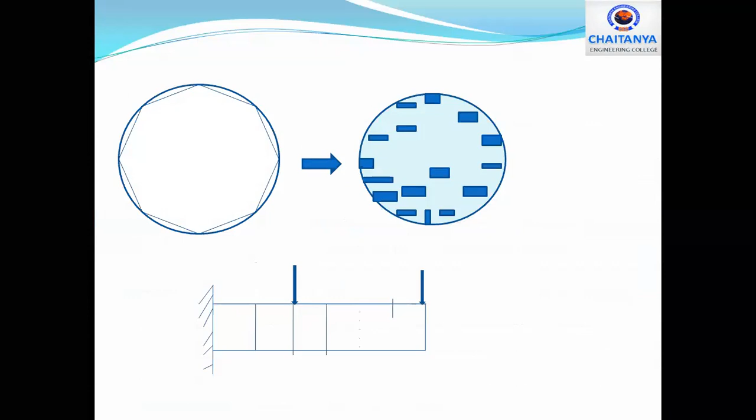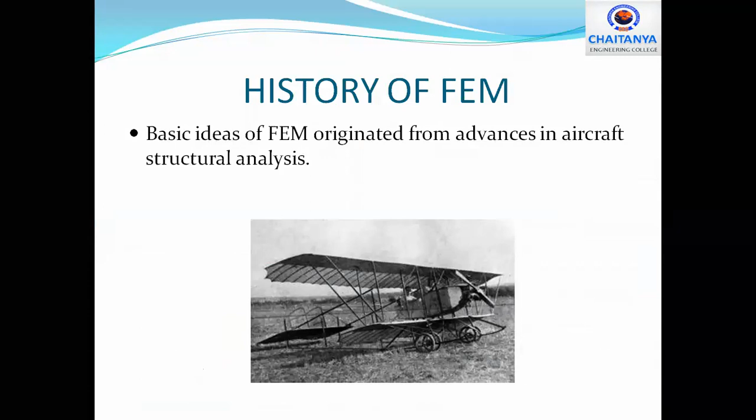So we have already seen how FEM is important as a numerical method, what a numerical method actually does, and why a numerical method always gives us an approximate solution but not the exact solution. We have also seen a brief history of how FEM developed over the years, and how it was developed as a tool to understand the structural analysis of aircraft structures. We have also seen the history of the people who extensively worked to improve FEM and make it as robust as it is now.

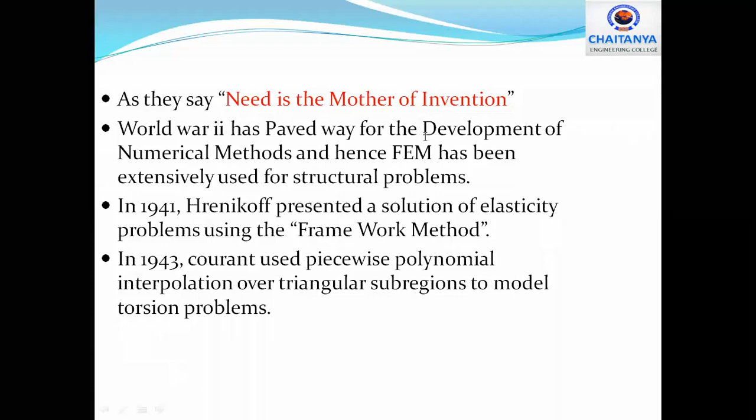We have also seen who was the first person to use the name 'finite element method' - his name was Clough, in 1960. From there on, in the 1960s, engineers used the method not only for structural analysis but also for fluid flow problems, heat transfer, and to calculate stress. People have also used this method in fluid mechanics problems, heat transfer problems, and many other areas, which at the end of this lecture I'm going to tell you about. We also looked at the first book published in 1967 on finite element method.

Finite Elements by Zienkiewicz. I told you that he's actually...

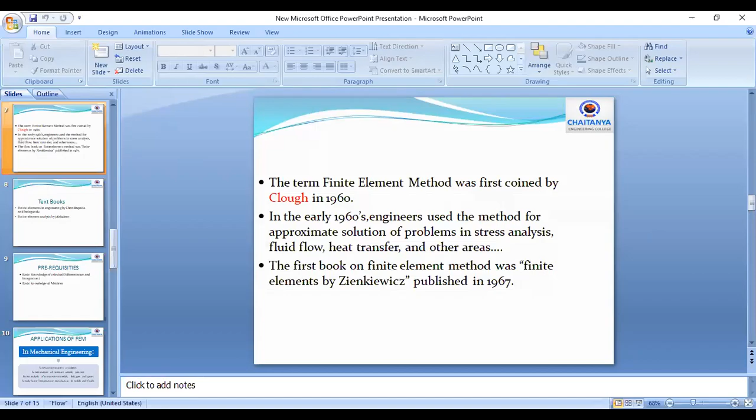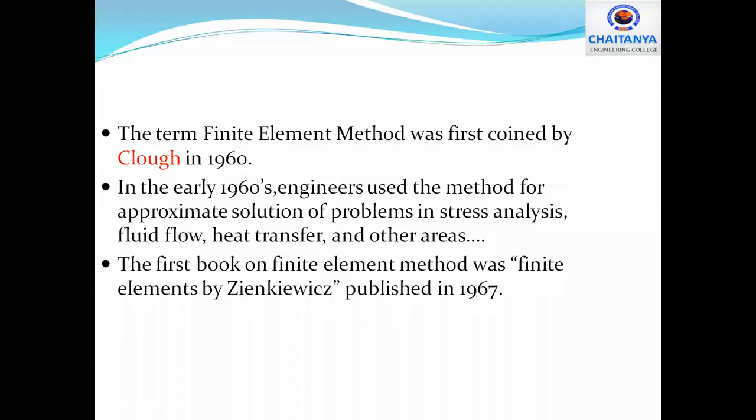Okay. Hello? Hello? Anybody please respond? Can you able to listen to me? Yes sir, yes sir, yes sir. Yes sir, okay, okay. Yes sir, yes sir, yes sir. Yes sir, yes sir. So now please unmute yourself.

So the textbook that we prefer for this particular course is a very famous textbook, not just in Andhra Pradesh and Telangana, but in the entire nation. People follow this particular book for finite elements - that is Chandrupatla and Belegundu. Most extensively, people refer to this textbook, Chandrupatla and Belegundu, Finite Elements in Engineering.

And I have this PDF file, I can send it to you, maybe to the CR, and you can share it. But yes, this is equally important - you may get this PDF, but this textbook is for your lifelong reference. It's not for one particular semester, but in fact this textbook can be useful for your whole life. Why did I say this? Because within a few minutes you'll know why I said this.

And the other book was Finite Element Analysis by Jalaludeen, which is also a very good book, and you'll find it very friendly, because the first book by Chandrupatla, you cannot easily understand unless you go through a lecture, and only then can you understand it. But Jalaludeen's book, you can easily understand it.

It's very clearly written, so these are the two textbooks which I would prefer. Most importantly, in Chandrupatla, let me tell you, in your examination, the direct questions without even changing the numerals from the first textbook, Chandrupatla and Belegundu, will come into your semester exams. It's not just for JNTU Kakinada, for any other universities in India, people extensively refer to this particular textbook, Chandrupatla and Belegundu.

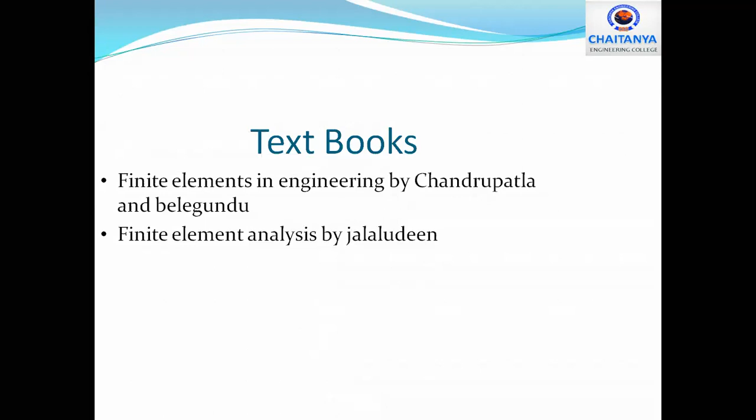Now, what are the prerequisites for this particular course, finite element method? For any course, before learning it, you should have some understanding of what courses you know, what kind of knowledge you are supposed to possess. For example, if you want to understand thermal engineering 1 and thermal engineering 2, you all know very well that you need a good understanding of thermodynamics.

Similarly, in order to understand finite element method, I think it is inevitable to have a basic knowledge of calculus, a basic understanding of differentiation and integration. Basic understanding, I'm not asking you to go deep into it, just basic formulas of differentiation and integration, and also the basic knowledge of matrices, because this subject is more like matrices rather than anything else. So matrix knowledge is also important, but not in the deepest way. At least 10th standard is enough, to be very frank with you, but +1 or diploma level material is also good enough.

So with these prerequisites, let me just quickly go into our course. So until now I have told you how exactly FEM is, what is FEM, it's a numerical method, and what does a numerical method actually do, and how problems can be tackled, in a very surface level.

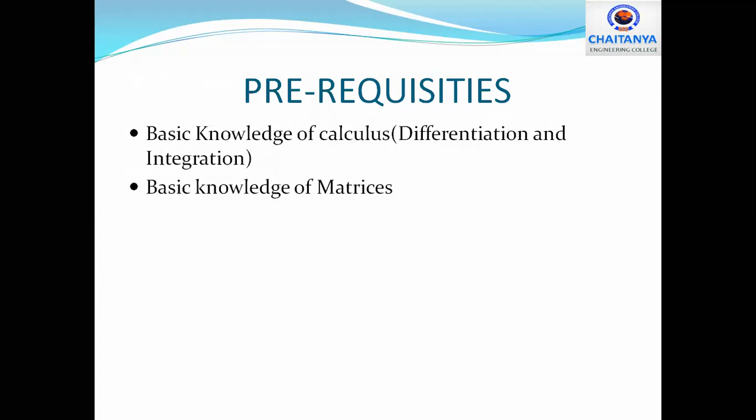Any one of your 4 sets will definitely have a question on applications of finite element method. It's not 100%, I tell you, but it's very likely that any one of your sets will get applications of finite element method. So what are the applications? Instead of giving you the entire applications, I thought it would be much better if I give you the branch-wise applications, the discipline-wise applications.

In mechanical engineering, the most important applications are stress concentration problems. So what do you mean by stress concentration problems? For example, you have an automobile structure, you have a design. If you are an automobile engineer, you have come up with a design, and you need to find what forces are acting on it. For your particular design, with those loading conditions, with those forces in effect, you understand where the stresses are mostly concentrated.

Why is that important? Because those are the places where there may be a potential danger of failure, a danger of the failure of the structure at that particular point. So it is very important in mechanical design, mechanical analysis, or structural analysis, that you need to find the stress concentration points, where the stress is actually concentrated. In those areas, there will be a potential danger of the structure getting damaged, maybe a fracture taking place, or even a complete structural damage.

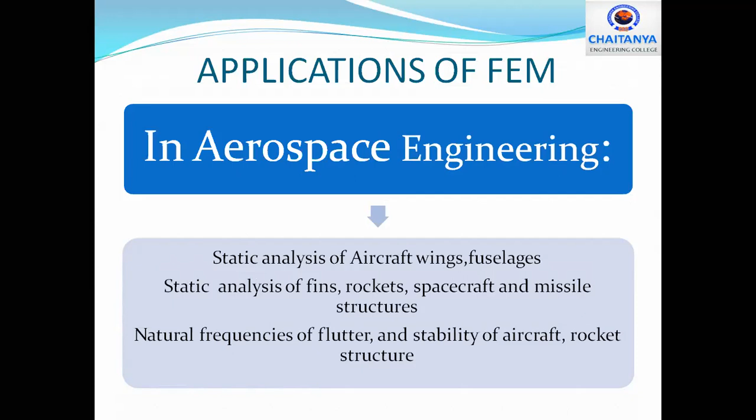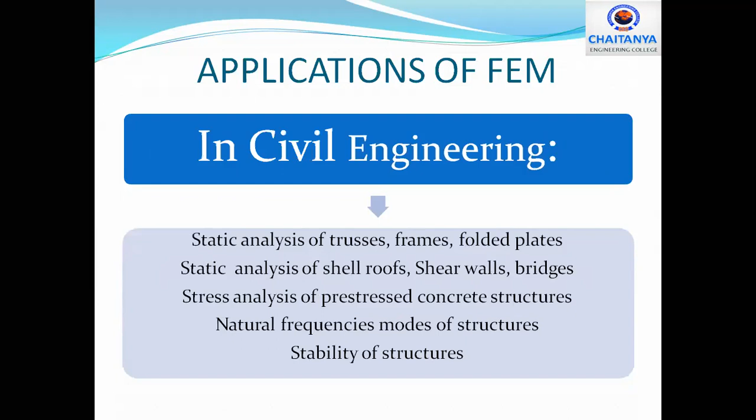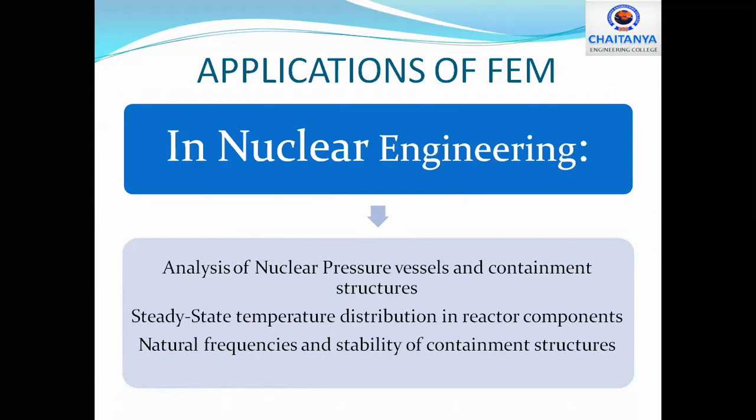So these are the applications of finite element method. I wanted to give you the applications first, so that you know the areas where FEM can be used. In all these areas, it's not necessary that you should be a mechanical engineer. The greatness of FEM is that if you learn it, you can work in a civil engineering background, construction works, biomedical engineering, aerospace engineering jobs, nuclear engineering, hydraulic engineering, and so on.

Even in electromagnetics, we use finite element method. In ECE, electronics and communication branch, they have electromagnetics, and even for analyzing electromagnetic waves, finite element method can be applied. You might wonder how the subject we are learning can have applications in ECE. Yes, it can, because it's not about the subject specifically—it's about the partial differential equation, it's about the numerical method.

Finite element method converts higher order partial differential equations into a system of linear algebraic equations. That is the work it does. Once you have a mathematical model in the form of a partial differential equation, it doesn't matter what kind of problem it arose from. All that matters is you must be able to convert that into a system of linear algebraic equations—that is what a numerical method does. One such numerical method is finite element method, which is extensively used in academia as well as industry.

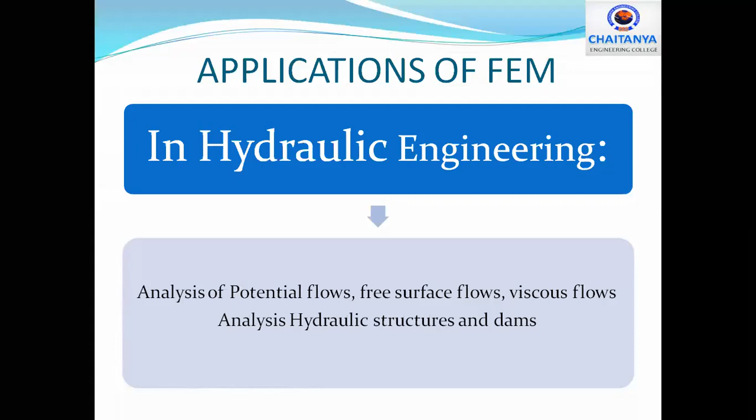Now, with this background, let me stop sharing, and within 5 minutes, let me have a discussion on how finite element method is very important.

When compared to all the other engineering subjects, not just in Andhra and Telangana but in the entire country, if you see the pass percentage of this particular subject, not just at BTech level but even at postgraduate level like MTech, most of the failures in the final year... I talk about BTech because that is most relevant to you. Most of the failures in BTech final year come from one particular subject called Finite Element Method. It might not be the case every time, but at least in JNTU Kakinada, it is the case. Now why should so many people fail mostly in this particular subject?

I do not know seriously, but there is a myth among the students. Before coming to my class, people ask me, sir, we came to know about this subject from our seniors or other sources, that Finite Element Method is a very hard subject and most people will fail in it. Well, it might be the case, but I cannot agree. If they say this is the only hard subject, in fact there are many other subjects. It's not the hard subject, or even if it is a hard subject, there is no point in people failing.